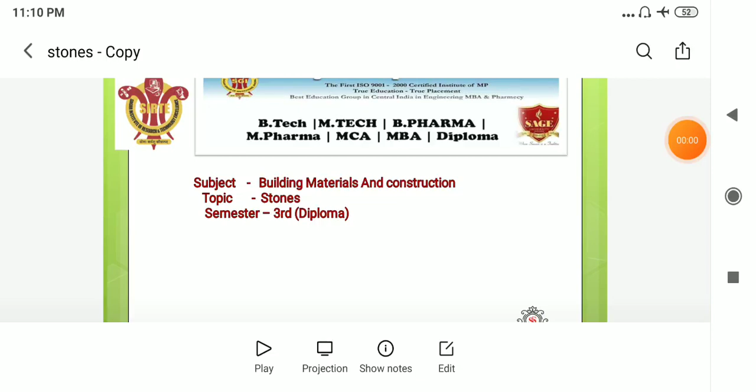The topic is the stones. This is the semester of third diploma. This topic is stones. Okay, so let us start. First one is the stones. Stones form one of the most important building materials.

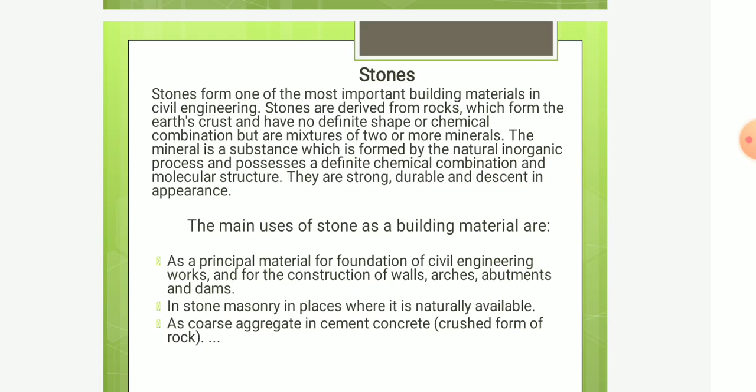For the construction of walls, arches, abutment and dams.

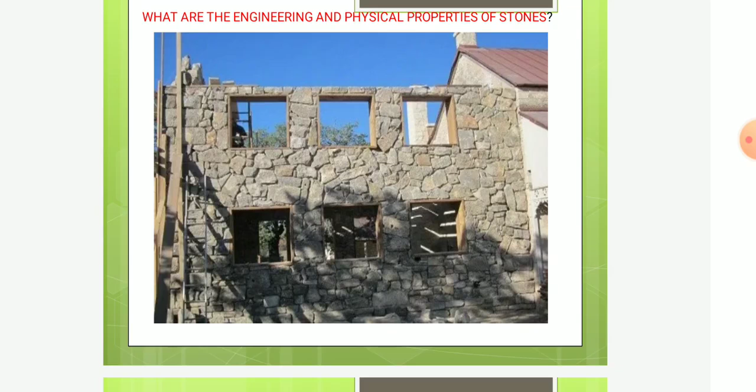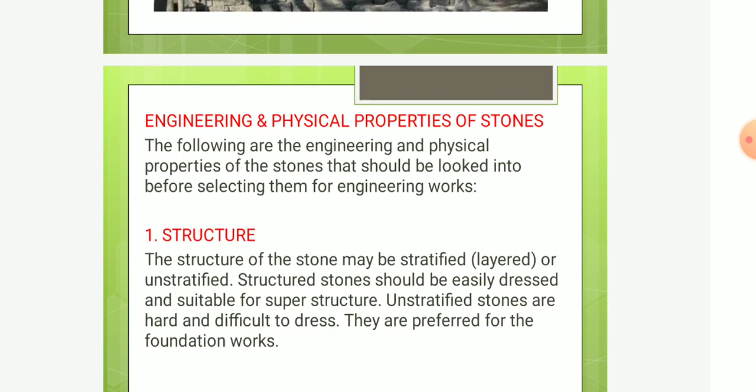So let's see, the following are the engineering and physical properties of the stones that should be looked into before selecting them for engineering works. First one is the structure. The structure of the stone may be stratified.

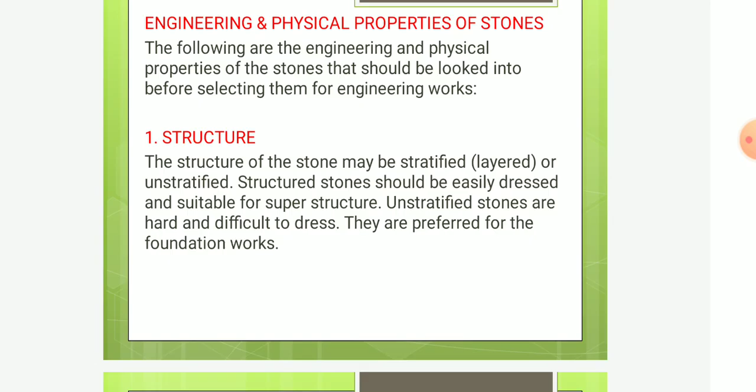For carving. Such stones are usually strong and durable. And then next is the density. Denser stones are stronger. Lightweight stones are weak. Hence stones with specific gravity less than 2.4 are considered unsuitable for buildings.

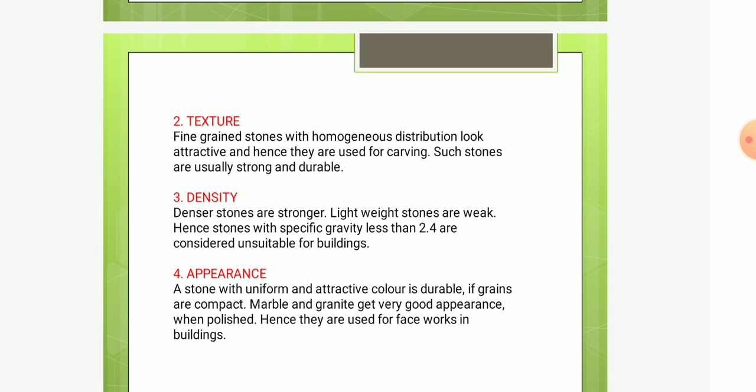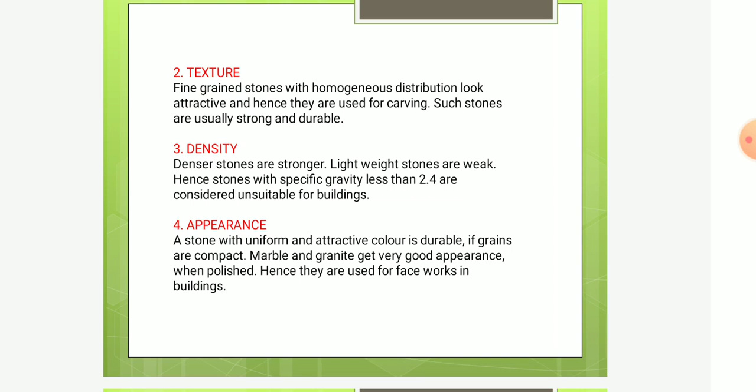Next is the appearance. A stone with uniform and attractive color is durable if grains are compact. Marble and granite get very good appearance when polished, hence they are used for face work in buildings. Next is the strength. Strength is an important property to be looked into before selecting stone as building block.

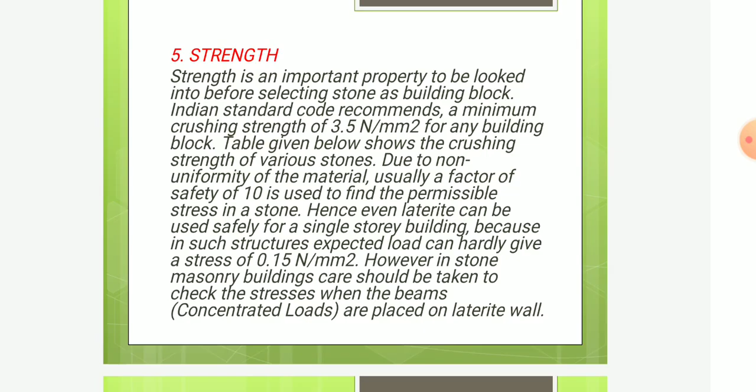However, in stone masonry buildings, care should be taken to check the stresses when beams with concentrated loads are placed on a laterite wall. Crushing strength of common building stones: first is the name of the stone, then the crushing strength in Newton per mm square.

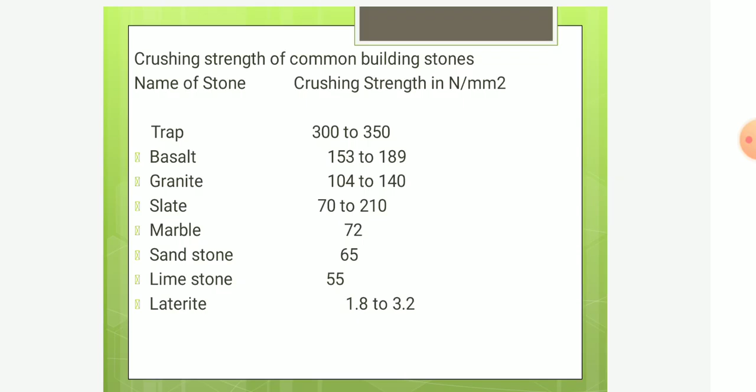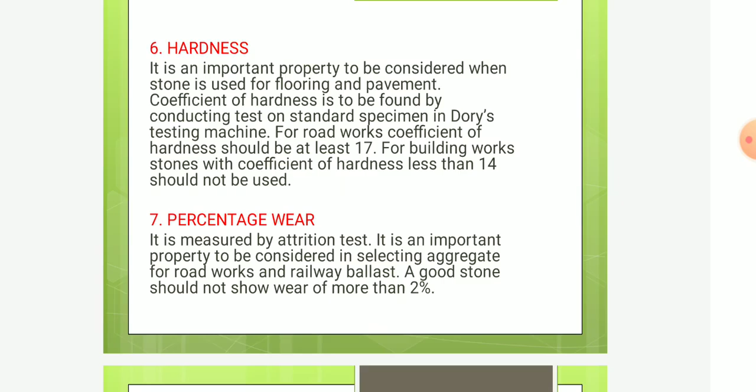Next is the hardness. It is an important property to be considered when stone is used for flooring and pavement. Coefficient of hardness is to be found by conducting tests on a standard specimen in Dorry's testing machine. For road work, coefficient of hardness should be at least 17. For building works, stone with coefficient of hardness less than 14 should not be used.

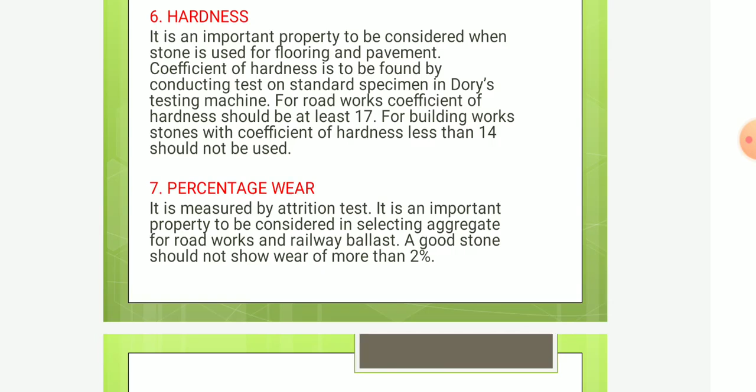Percentage wear. It is measured by attrition test. It is an important property to be considered in selecting aggregate for road work and railway ballast. A good stone should not show wear of more than 2%.

Next is the porosity and absorption. All stones have pores and absorb water. The reaction of water with stone causes disintegration. Absorption is specified as the percentage of water absorbed by the stone when it is immersed under water for 24 hours. For a good stone, it should be as small as possible and in no case more than 5.

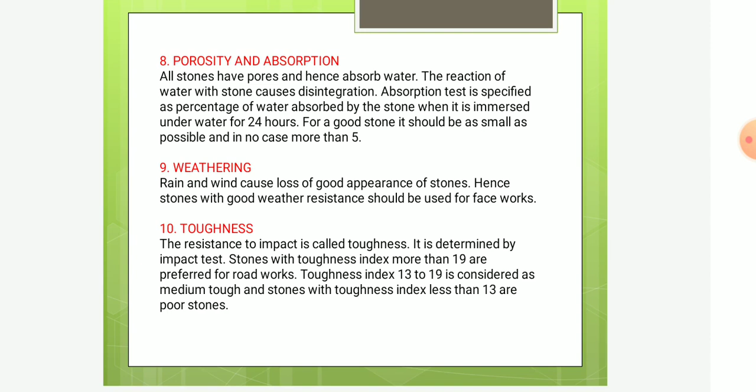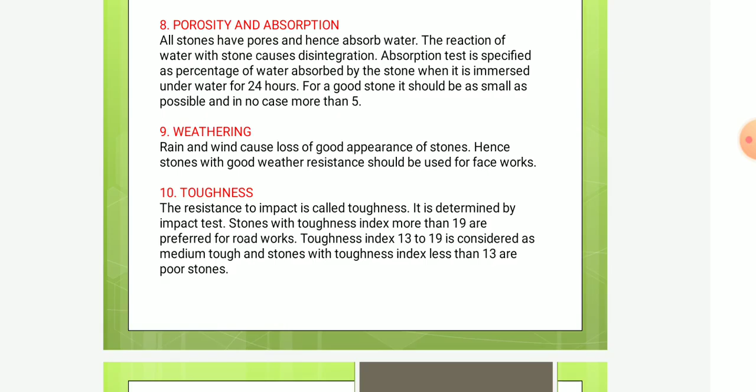Weathering: rain and wind cause loss of good appearance of stones. Hence, stones with good weather resistance should be used for face work. And then the toughness. The resistance to impact is called toughness. It is determined by impact test. Stones with toughness index more than 19 are preferred for road work. Toughness index 13 to 19 is considered as medium tough, and stones with toughness index less than 13 are poor stones.

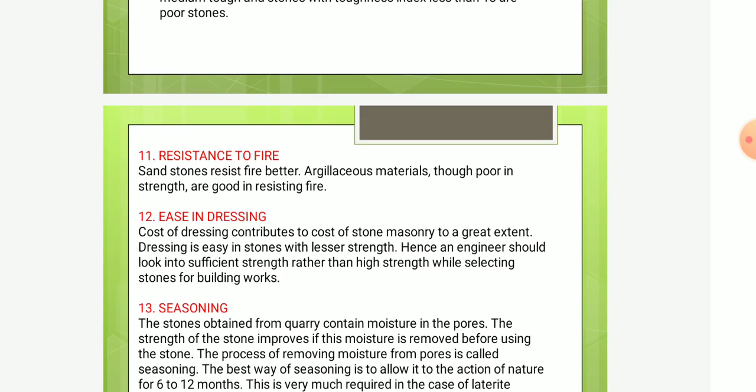Next is the resistance to fire. Sandstones resist fire better. Argillaceous materials, though poor in strength, are good in resisting fire. Next is the ease of dressing. Cost of dressing contributes to cost of stone masonry to a great extent. Dressing is easy in stones with lesser strength. Hence, an engineer should look into sufficient strength rather than high strength when selecting stones for building work.

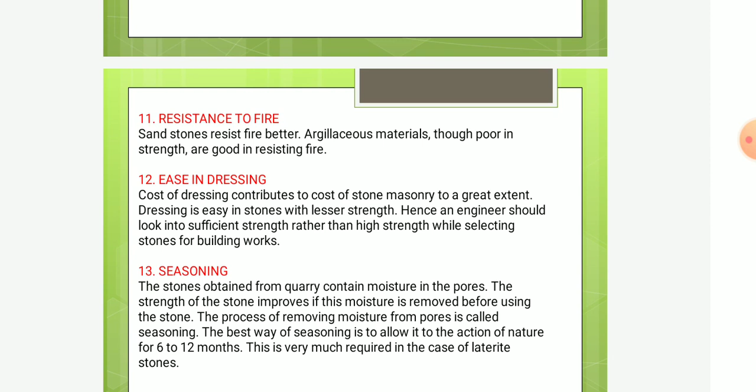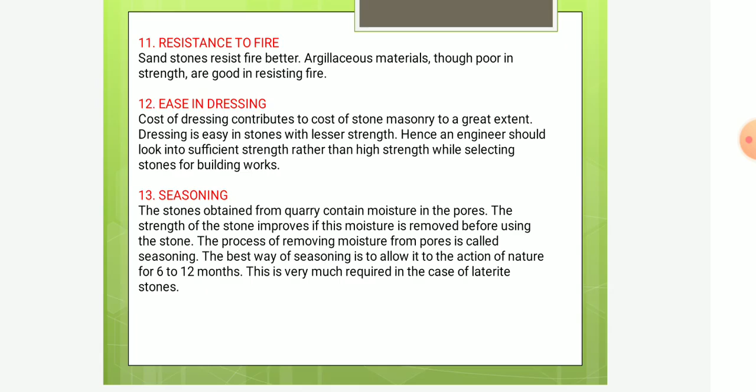The last is the seasoning. The stones obtained from quarry contain moisture in the pores. The strength of a stone improves if this moisture is removed before using the stone. The process of removing moisture from pores is called seasoning. The best way of seasoning is to expose it to the action of nature for 6 to 12 months. This is very much required in the case of laterite stone. These are the physical properties of stone.